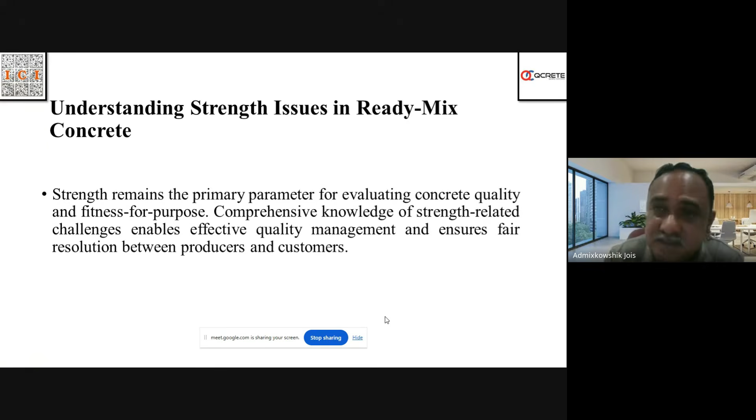Strength remains the primary parameter for evaluating concrete quality and fitness for purpose. So if any concrete producer has produced concrete of any grade, the only proof that he has to show that he has supplied the right concrete, fit for use, matching the requirements and specifications given by the customer, is the cube strength. So it is very essential to know the different factors which affect concrete strength, and how we can reach the concrete strength to its maximum potential through various concrete quality control procedures.

So I would like to present here what is given in IS as compliance parameters, also popularly referred to as acceptance criteria. This acceptance criteria for cube strength is very simple and clear. If you have a set of cubes when you have done the concrete, a set of 4 consecutive cubes, each result should comprise 3 individual cubes, and then the result, which is an average of a set of 4 cubes or 4 results, should be FCK plus 0.825 into standard deviation, or FCK plus 3. An individual result can be FCK minus 3.

Here, individual result means average of 3 cubes. So this is a standard, very clear indication of how IS defines the acceptance criteria. So we need to know this before we move to low cube results or any such parameters.

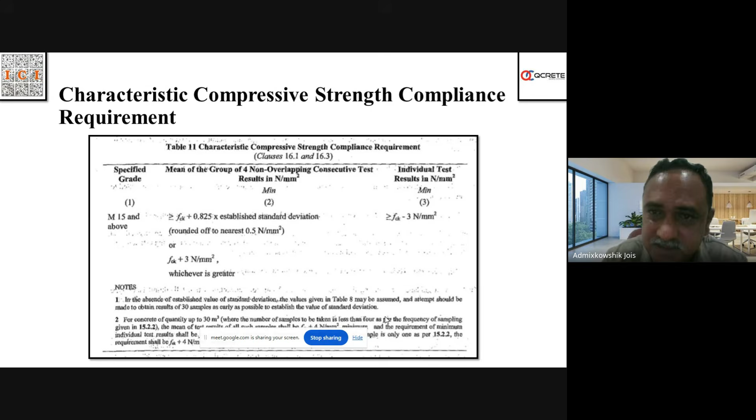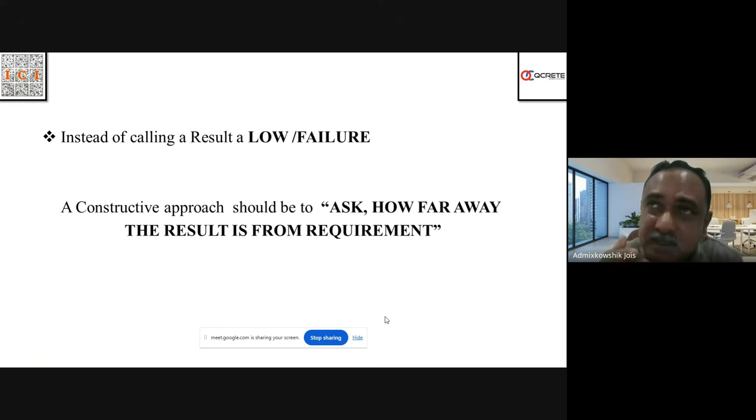Instead of calling a result low or a failure, a constructive approach should be to ask how far away the result is from the requirement. Labeling it as failure or low is a negative, destructive comment. We should move towards a constructive way of asking how far the result is from the requirement.

Now, regarding cube issues or strength issues, in other countries like the USA this is tested using cylinders, whereas in countries like European countries and in India, we cast cubes.

So we have different classifications to categorize different issues. One is intrinsic strength issues, where once the concrete already has this kind of issue, you cannot do much about it. You have to take remedial treatment. Here, the actual strength of the concrete is not up to the mark. The other category is apparent strength issues.

When testing at any site, you can see some perception by somebody. During testing, some mistake might have happened somewhere, so it appears at the surface level that there is a problem with the concrete. These are apparent strength issues which may not be actual, and need further investigation to really classify them as intrinsic strength issues.

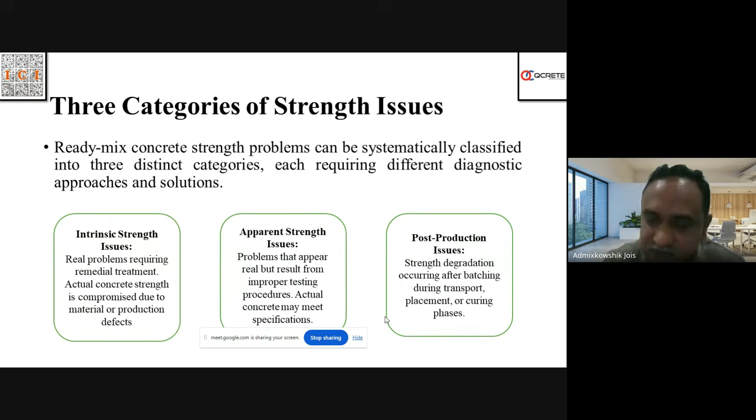So for intrinsic strength issues, we go step by step. The defects can be classified into material quality defects, variations in properties, water cement ratio errors, batching inaccuracies, and design inadequacies.

Material quality defects deal with substandard materials, either cement, supplementary cementitious materials, or aggregates, which don't meet specifications. The other one is property variations, significant deviations in the cementitious material itself, which were never there during the trials.

Of course, the most serious issues cause intrinsic strength problems. One report, from a survey done for failures of cube strengths in Australia between 1995 and 2005, showed that based on the cube results collected, 90% were mostly belonging to water cement ratio errors.

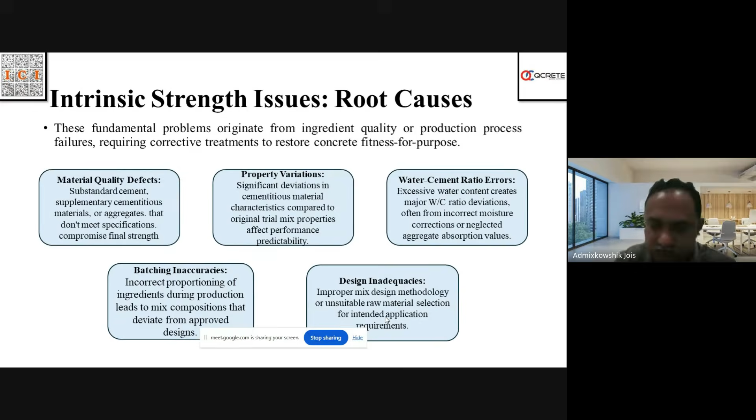We take the issues with our basic ingredients. Cement is the basic binder, and the concrete world is completely governed by the strength of cement and what cement contributes to concrete. Starting in India from 1995 onwards, especially 2000 onwards, we saw emergence of large usage of fly ash and GGBS, and these are all called cementitious systems. We go one by one.

What happens when we have substandard material? When we talk about cement, it is produced as per standard in India and elsewhere, with significant development in R&D and modern equipment used in quality control procedures of cement manufacturing, and later analyzing the cement, which have made significant strides in cement quality control. That said, we still have issues with cement. For example, we had seen way back between 1990 and 93, when I was working as an application engineer, just learning about concrete.

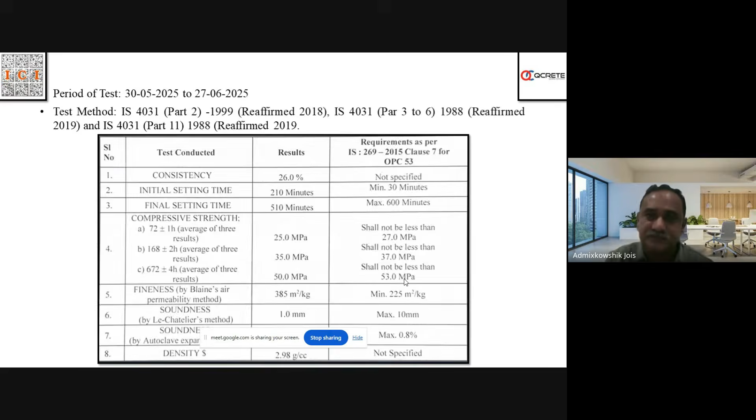Coming to fly ash—fly ash is a waste material. Nobody takes responsibility for it once it's taken from the thermal power plant where it's produced. It's brought in bulkers and given to ready-mix companies. Variations in fly ash fineness and particle size can affect the concrete, and can also affect the pozzolanic reactivity, which indirectly affects strength and durability.

So ready-mix concrete producers will do the fineness test, and surface area is very important. The reactivity, pozzolanic reactivity, and effectiveness of fly ash depends on the surface area. A 45 micron sieve test is done, and retention should not be more than 34%.

For GGBS, it's 20%. The glassy material—Al2O3, SiO2, Fe2O3, and CaO—in both fly ash and GGBS will vary. More variations occur in fly ash because it has no quality assurance from anybody, since it is an absolute waste product for a thermal power plant.

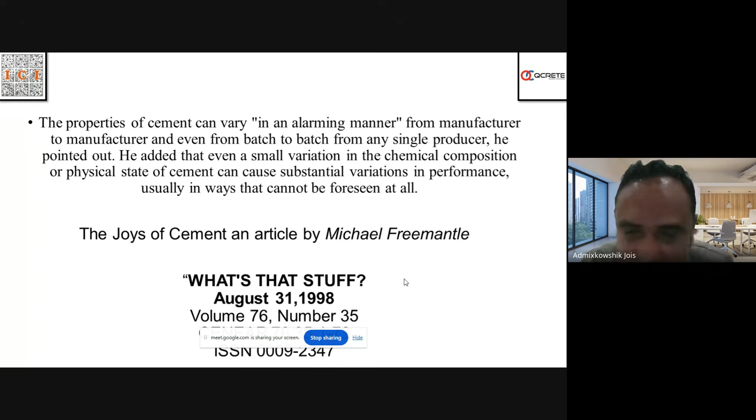Next, what are the other problems that can occur apart from the materials? You start doing mix design as per IS standard or any standard, then you select wrong materials, bad sources of material, which we have already talked about.

For example, some people are fascinated by what they have done in the past. Somebody has done a mix design for M45 or M50 at 450 kgs, simply specifying 450 kgs based on his old experience, old data, which may not work. For example, somebody has done a mix design based on OPC here; the same thing cannot be done with a different source or a different brand of cement somewhere else.

We should also be careful that if we have done the mix design with a set of materials today, the same materials have to be used during the implementation of concrete production. So today we do with a set of materials, one admixture, one brand of cement, and then you change it during the process of production and casting of concrete. Definitely somebody can say cement is cement, but it is not like that. Ingredients can change, sources can change, and this can affect the results as the project progresses.

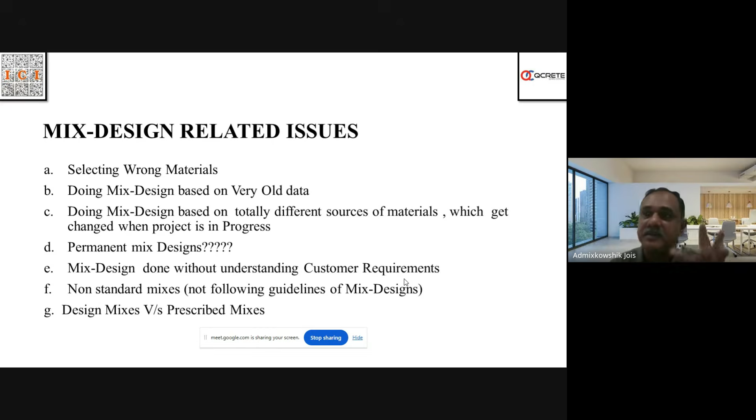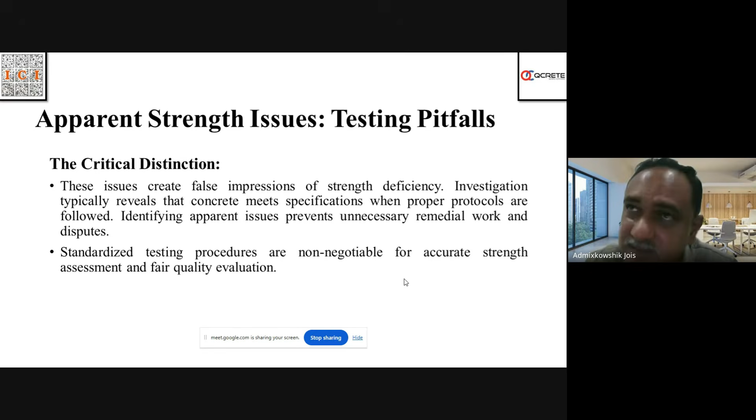So these are mix design related issues which may lead to problems of strength. Apparent strength issues basically happen because of mistakes that we do during production, after production, and then in the QAQC procedures. If there is a problem with the QAQC procedures, then we get a perception that the material or concrete we supplied may not have met the requirements. Our customer may see it like that, but actually it might have met the requirements. So these are apparent issues.

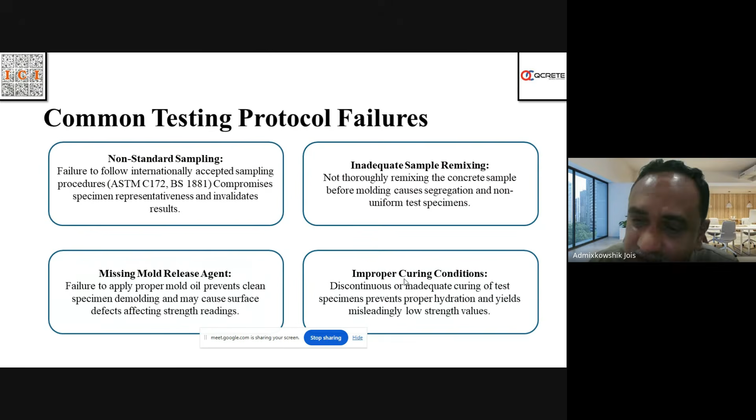It is generally related to non-standard sampling, inadequate sample remixing. Some smaller issues, which somebody may think are small, like the mold releasing agent not properly selected, or improper curing conditions. So these are some of the issues.

Now, we come across people who day in and day out do concrete production and delivery. There is a standard procedure for taking samples, which very clearly says, as per BS standard, if you are taking from a 6 metric cube truck, the first metric cube has to be left, the last metric cube has to be left, and in between we should run the scoop and take sufficient concrete for making sample cubes as well as the slump test. This is called a standard composite sample.

Whereas the ASTM standard says 10%: first 10% you leave, last 10% you leave when the truck reaches the site. First you mix thoroughly with high RPM for 2-3 minutes, then you leave the first 10% and the last 10%, taking the concrete in between for sample. Sufficient sample has to be taken. So what they specifically say is, when you take such a sample, you can take the slump test and also the cube sample. So this is a standard.

The Indian standard, on the other hand, says first you have to leave 0.3 cubic meters when the concrete has mixed, and when it is going down the chute, you leave the first 0.3 cubic meters, and then take the concrete sample at regular intervals. This is what the IS says. This is similar to an alternate method specified in BS, also called spot sampling or alternative sample method, where we leave the 0.3 cubic meters and just take a sample as the concrete is moving down the chute for assessing the slump.

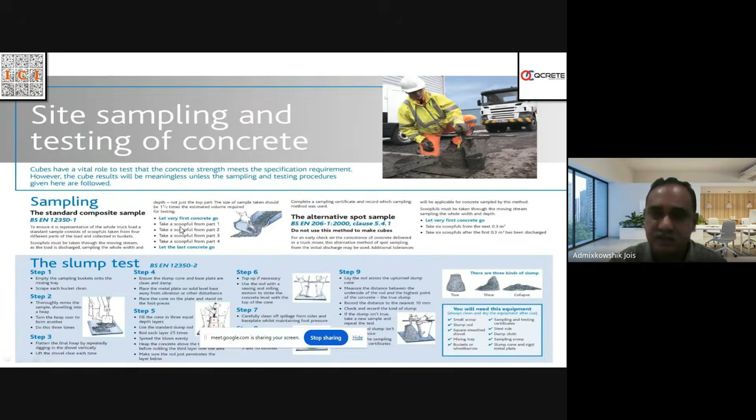Here we need to know that BS very specifically and clearly states in the standard that spot sampling or alternative sampling is only for making the slump test, not for taking cubes. Whereas the Indian standard talks about taking the sample after 0.3 cubic meters is discharged.

Whatever standard we use, let us stick to the standard and do the job. If you do it in any non-standard way, the sample will not be representative. Why should we take care of this? For example, when we do any test, like an aggregate test, or any test for that matter in concrete or any other field—say a biscuit factory manufacturer—there is a standard for how to take a sample before sending material for packing and then to the customer. You have to use that standard. Similarly, you have to use the standard for making a sample.

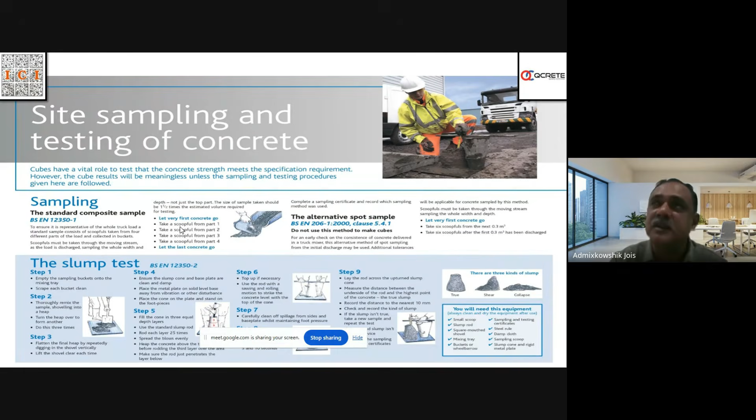And we know the slump test involves 25 strokes in 3 layers, and for casting cubes, 35 strokes in 3 layers. This is very important to know, because even though it looks very simple, if we don't stick to this, it will lead to apparent strength differences, or somebody may become skeptical and start thinking whether we have got the right concrete or not.

When we cast the cubes, follow the procedure, properly mix the concrete which you have taken, very simple. Then the cubes have to be transported to a place where you have a curing facility, and the curing facility water has to be at 27 plus or minus 2 degrees as per Indian standard.

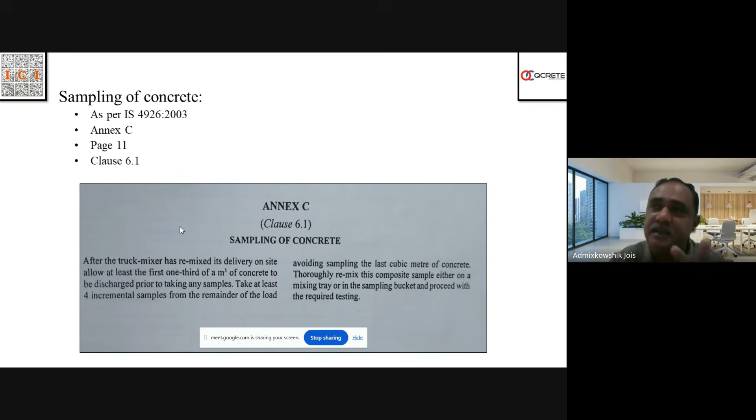The Indian standard very clearly says as per IS 4926, for 0.3 cubic meter we have to leave, and then we have to take at least 4 incremental samples from the remainder of the load. This is how the sampling is done, and we have to stick to this sampling procedure.

Cube molds have to be maintained properly. Cube molds have to be prepared. Cube molds have to be checked for compliance: 150 mm by 150 mm by 150 mm.

Very important, the curing room has to be properly made, where you use thermostats in winters since the water is drying. You heat the water in winter low temperature situations, and in summers you run AC, so that the water temperature is 27 plus or minus 2 degrees. So in India it is 27 plus or minus 2 degrees.

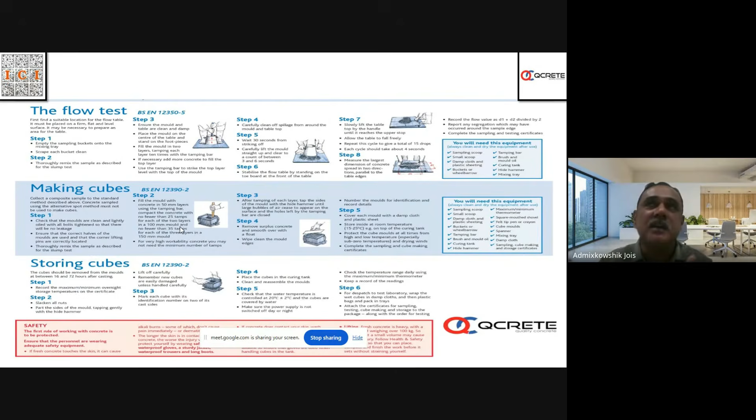Each truck taking one sample, randomly asking you to take 2 cubes, or when the concrete is already discharged almost, at the end there is some slurry. If the customer takes the cubes in that kind of situation without following a proper procedure as described here, it may lead to apparent strength issues.

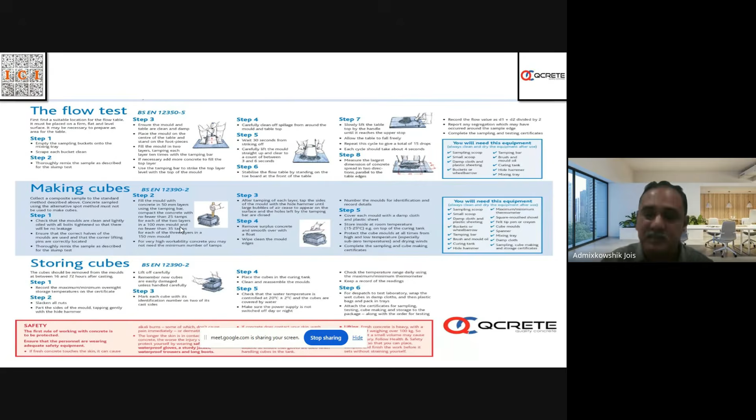J.D. Dewar and Anderson, two Britishers who worked extensively on cube strength, studied the different effects of each of the operations associated, which can be classified as apparent strength issues, and gave data like this.

Here you can see sampling error. Many times we hear, sir, we have been doing this sampling and testing of cubes for 20 years, we have trained technicians, and all this we hear. But unless we stick to the standard procedures, especially in sampling, making cubes, remixing the sample, it will lead to a lot of apparent issues which may become a nightmare for many associated people or stakeholders, because your activity will be about how to prove this apparent low cube or unacceptable cube result as an acceptable cube result.

So you have to invest a lot of time and spend a lot of money to prove and convert that from an apparent issue to an acceptable cube strength.

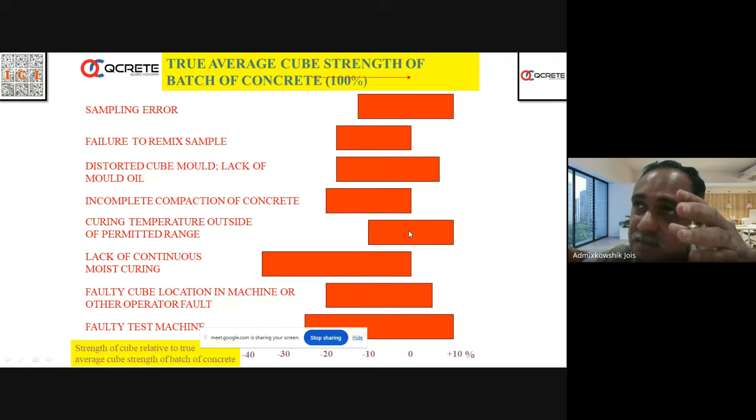Many times in big projects, columns are cast, say in the morning, and they de-shutter the next day by 11 or 12 o'clock when temperatures are high. After de-shuttering, it is not attended to because many columns have to be de-shuttered, so curing starts after 1 or 2 days. As a result, you get lower strength.

Similarly, it happens in the cubes also. If the cubes are not transported to the curing tank in time, if not covered with a polythene sheet, moisture escapes, and then you bring it later after 2 days and start curing. It is like not giving proper food to a child in the beginning - it will show stunted growth.

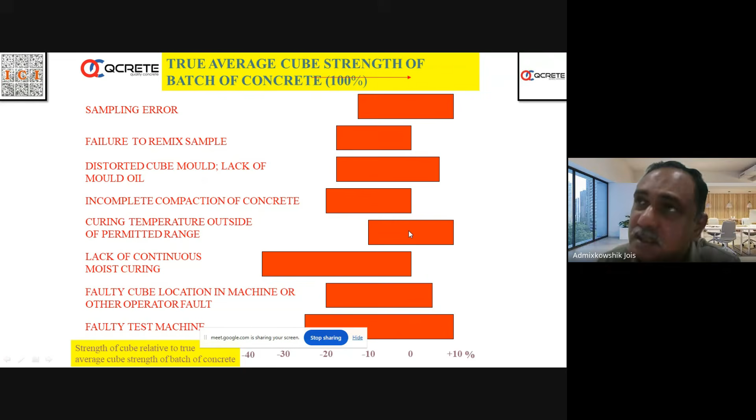The bones and development of the body will not be proper as required. So whatever you do later, giving proteins or whatever you want, the growth may not be good - it becomes like malnutrition. Similarly, curing has to be done properly. Initial curing is very, very important that we have to take care of.

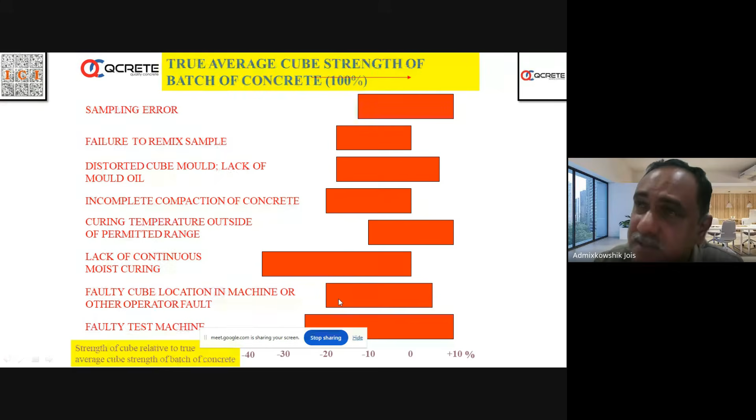Faulty cube location in the machine - if we are not properly placing the cube, it will lead to eccentric loading, leading to failure, and again apparent low strength.

Faulty test machine, as we discussed - if you are operating a very old machine, because the machine is being operated and we are emotionally connected for 20 years, thinking 'since 20 years I'm using this one, let me use the same machine without calibration.' Such an attachment to an old machine may not give a proper result unless it is rectified and calibrated properly.

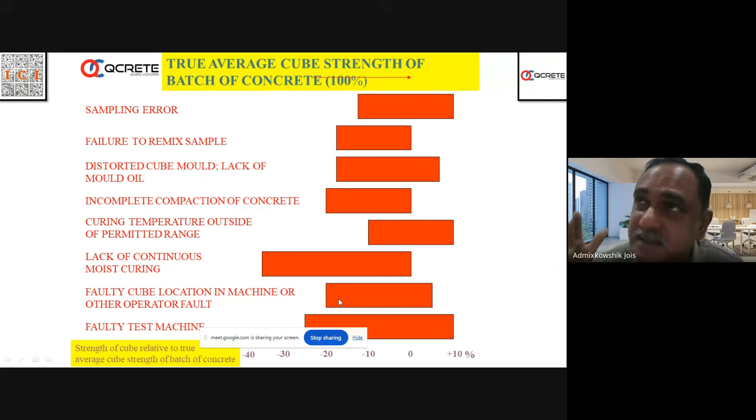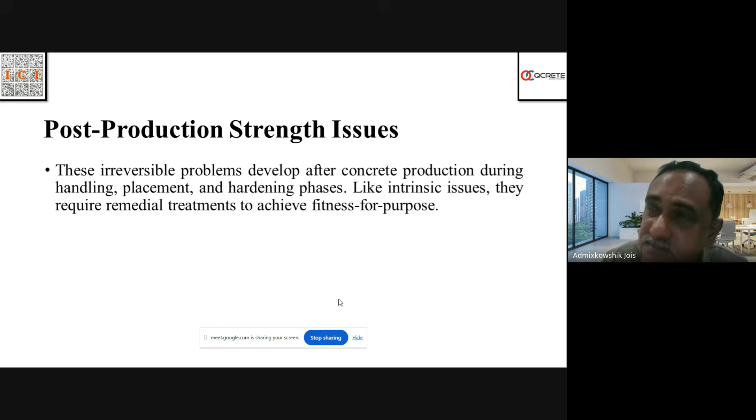So, post-production strength issues - what are the issues that occur? This is an important point actually.

Inadequate consolidation - as we already discussed, if the vibration is not proper, improper curing practices on site, that may lead to problems. One of the major issues across India in many cases is unauthorized water addition.

Mix design is done with a lot of care, and we send the concrete to the site. For example, somebody will add water after 1 or 2 hours because the slump is slightly less, without considering that by adding a chemical admixture you can boost the slump. If that is not considered and someone simply adds water - or it can happen via a ready mix truck if the nozzle is not tightened properly and water falls into the concrete - it may give better finishability, pumpability, and placeability, but it will cause strength issues.

So, unauthorized water addition - if any water is added to the concrete, you are disturbing the concrete and lowering its strength and durability. We have to be very clear about that.

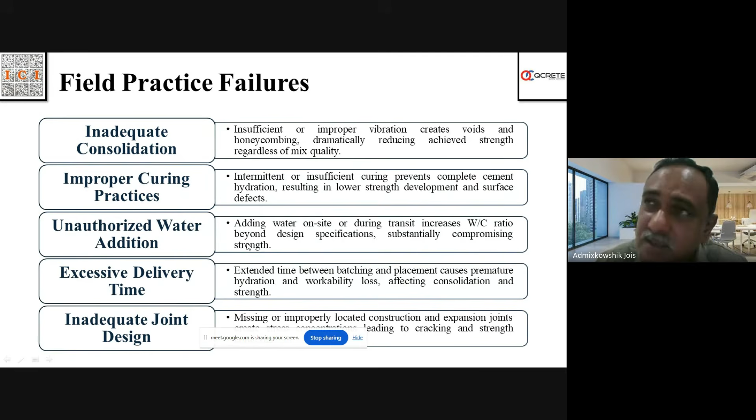If you don't use superplasticizer cum retarders, which most ready mix companies use, and if you are not doing concrete on a rainy day or winter day where temperatures are cold, the slump loss will be high, and you will end up pouring low slump concrete - disturbing it when placed after 3 or 4 hours, when the initial stage of setting has already started.

So if you place the concrete later, as late as 3, 4, or 5 hours, especially for high strength concretes like M40s and M50s where the OPC and cementitious content is very high, you have problems because the reactions are much faster in high strength concretes compared to low strength concretes.

So we have to be very careful to unload the concrete as early as possible. As I repeat, IS 4926 specifies that once the concrete is batched, it has to be unloaded in 2 hours, unless it is incorporated with superplasticizer cum retarder.

Or type G admixture, or you are doing concrete in a low temperature situation like a very rainy day or winter day where temperatures are low, or you are using a special admixture which can give the concrete 4-5 hours slump retention, and you have data for that - only then can you use the concrete beyond a certain stage.

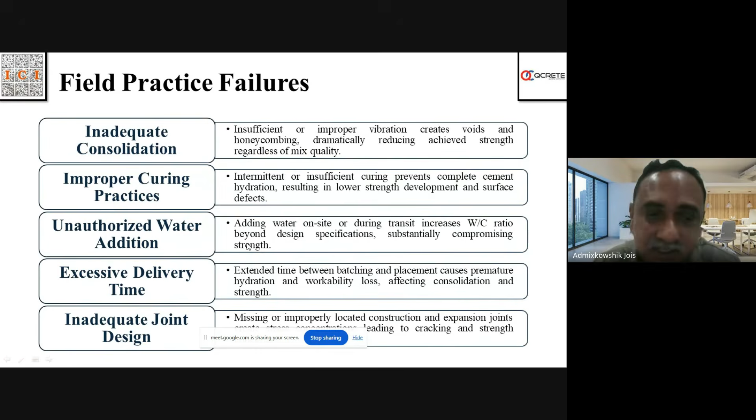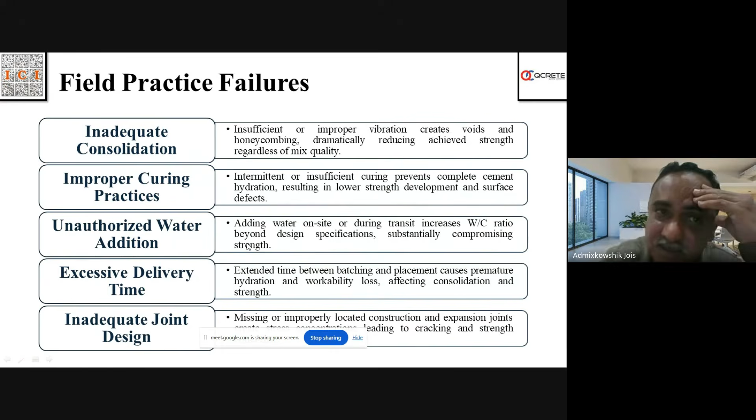And then sometimes we get unplanned joints - construction joints and contraction joints are not planned properly, and then you have problems with strength. So these are field practices - what happens in the field.

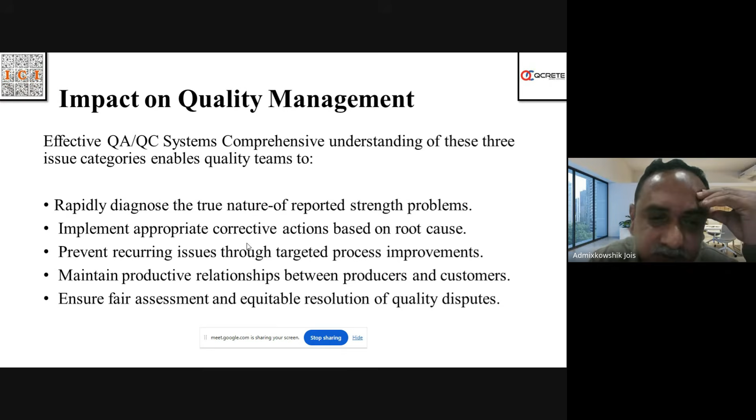Impact on quality management and effective QAQC systems: a comprehensive understanding of these three issue categories enables quality teams to rapidly diagnose the true nature of reported strength problems, implement appropriate corrective actions based on root cause, prevent recurring issues through targeted process improvements, maintain productive relationships between producers and customers, and ensure fair and equitable resolution of quality disputes.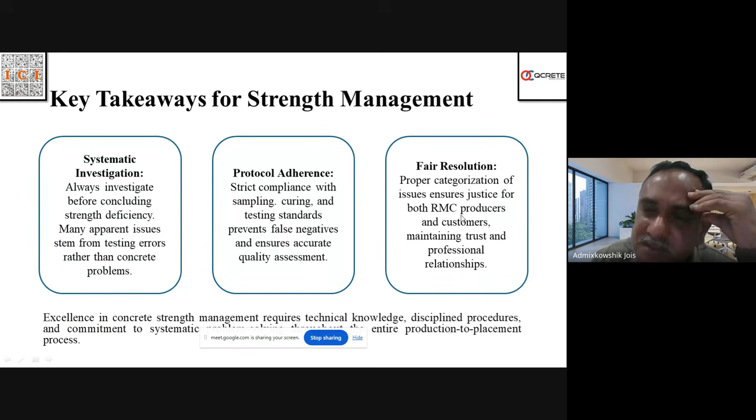So we need systematic investigation - always investigate before concluding strength deficiency. As we started our dialogue, you have to first know how far off your result is, instead of just talking about low result or failure. There must be strict compliance with sampling, curing and testing standards, proper categorization of issues, ensuring justice for both RMC producers and customers, and maintaining trust and professional relationships.

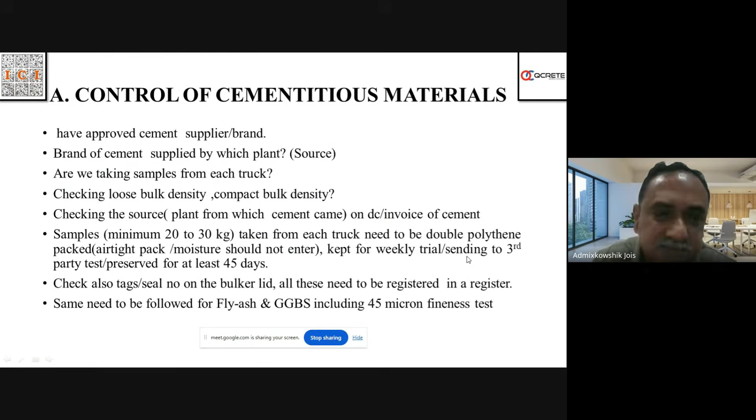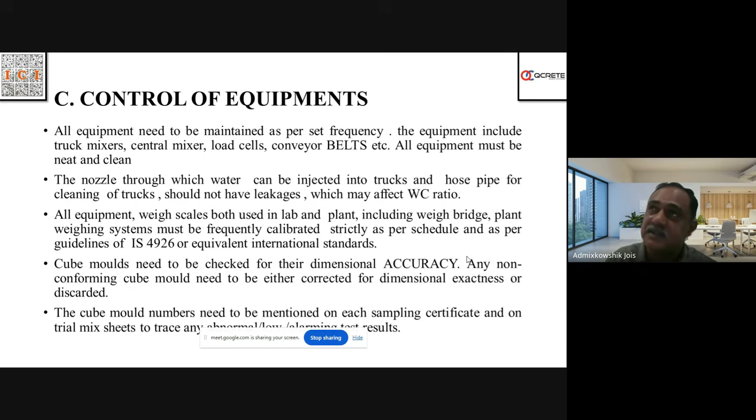So what are the things we have to do? Control of cementitious materials, control of non-cementitious materials, control of equipment - batching accuracy is important. We have the guidelines issued by IS 4926, where it says the batching tolerance is plus or minus 2% for cementitious materials and plus or minus 3% for other materials. So mix designs have to be validated and approved.

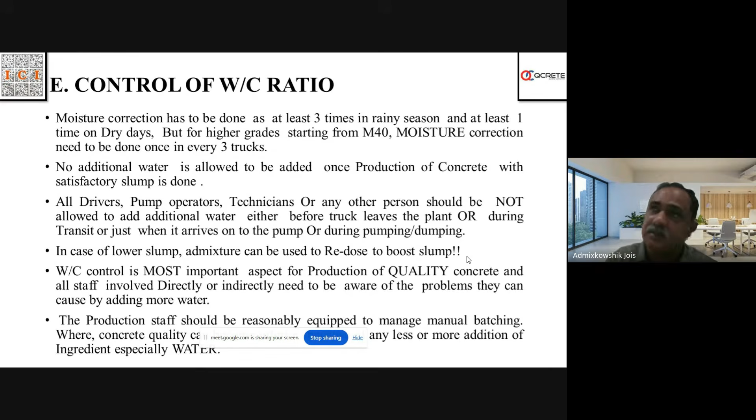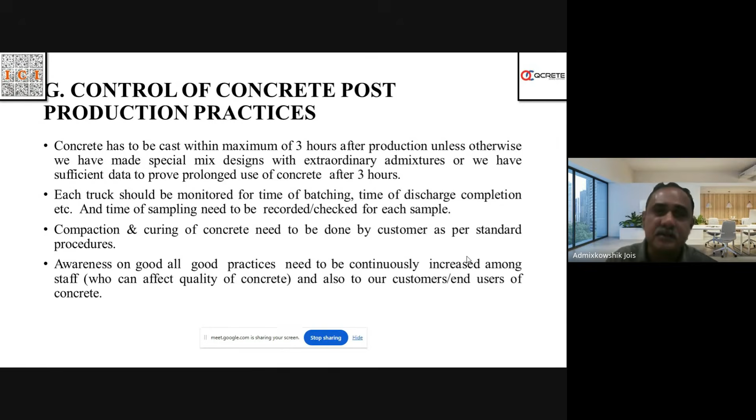Water control is very important. Control of water-cement ratio is most important. Control of irregularities in slump and strength is important. Control of concrete post-production practices is important.

And interestingly, BS 8500 very clearly talks about long-term strength. So even if the strength at 28 days is not good, not up to the mark, there are considerations based on site requirements and based on your experimental data. If you have proper data, it can actually be used.

There are big buildings, tall buildings, skyscrapers in Toronto in the 1980s itself, where the compressive strength was specified at 90 days instead of the standard 28 days. That allowed the incorporation of pozzolanic material, allowing lower usage of OPC and higher amounts of pozzolanic materials - lower 28-day strength, but higher 90-day strength. The specification was that the structure has to meet the requirements, the cubes have to meet the requirements, concrete has to meet the requirements at 90 days.

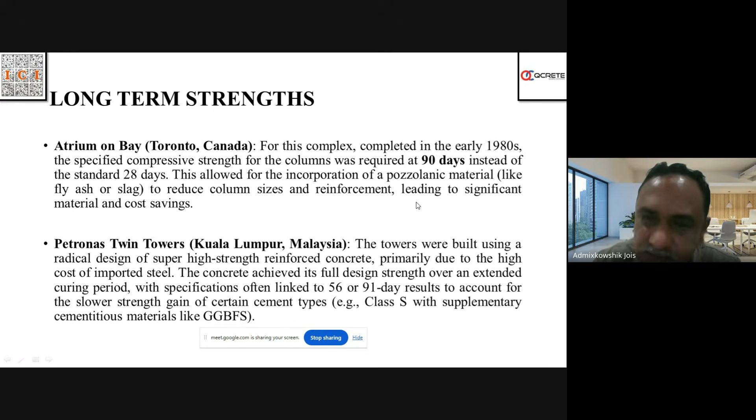Similarly, for the Petronas Twin Towers, the specification was often linked to 56 or 91 days, accounting for slower strength gain of certain cement types. So BS 8500 very clearly says this, and there are other codes also. Now we have a lot of data in India too showing that long-term strengths are acceptable.

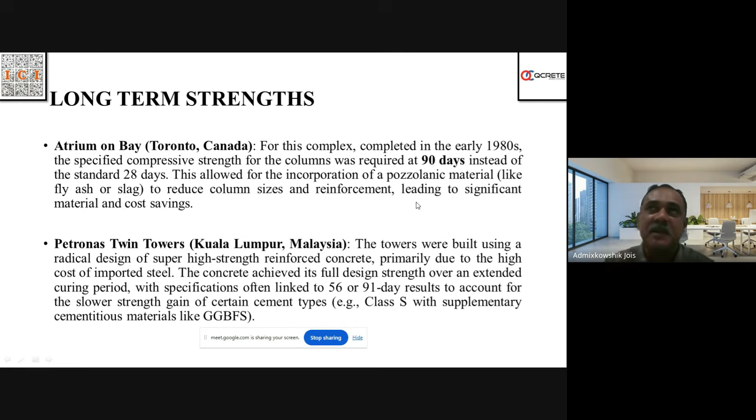So what we can say is: a low cube strength is not a low cube strength unless it is investigated, unless it is properly studied. In most cases it can be apparent strength and may not be intrinsic strength. So we need to judiciously arrive at a final conclusion on whether the concrete is acceptable or not.

We need to understand that concrete as a material tolerates nonsense only up to a particular limit. Too much abuse of concrete - like addition of water, meddling with it, and not handling it properly, either during production, during transit, or post-pouring during compaction or curing - if it is not handled properly, concrete will definitely not forgive. The strength will show it, and we will have to do a lot of tests and invest time.

So through this medium, I request all of the audience to take care of the concrete. It is not only just doing mix design - everybody should be on their toes when producing, placing and transporting concrete, in all aspects.